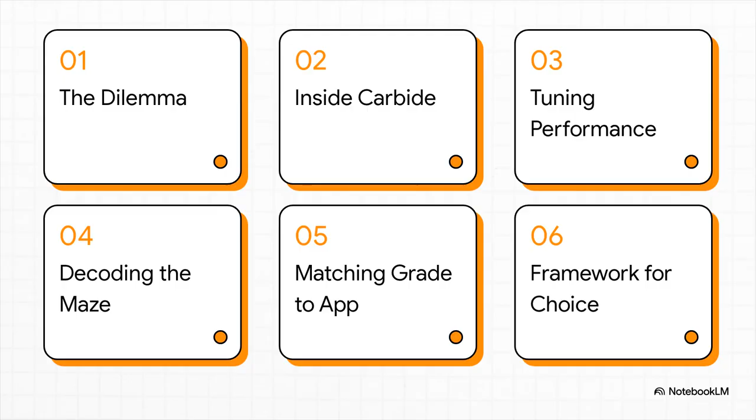All right, so let's jump right in. What's the fundamental issue here? Why do these tools actually fail in the first place? Oh man, we've all been there, right? You've got this beautiful, high-precision tool, thousands of dollars invested, and then, bam, it fails. The press stops, production grinds to a halt, and everyone's asking, what happened? Well, the answer almost always boils down to one fundamental trade-off.

So, a carbide tool really only fails in one of two ways. On one hand, you've got abrasive wear. Think of it like a slow death. The tool just gets dull over time, losing its edge. Then you have the other side of the coin: chipping and fracture. This is the sudden, catastrophic break. Now, the property that stops wear is hardness, and the one that stops fractures, that's toughness.

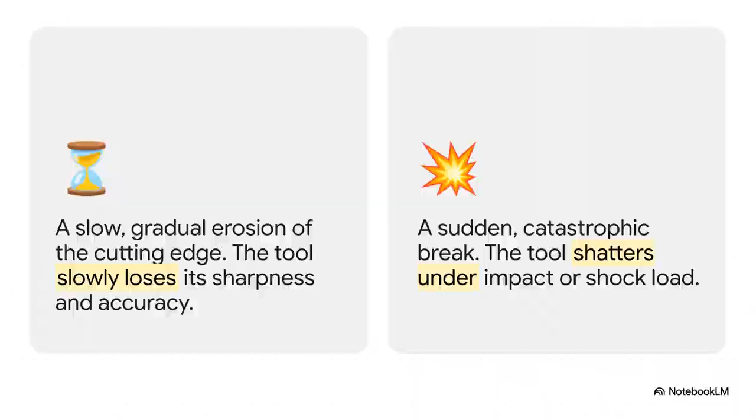And that, right there, is the core dilemma. You can't just crank both up to 11. If you make a tool harder, it gets more brittle. If you make it tougher, well, it gets softer. So, to solve this dilemma, we have to play detective and look inside the material itself. What exactly is this stuff we call cemented carbide?

You know, it's not just a simple metal, it's a composite. And the best way to think about it is like high-performance concrete. You've got the gravel, or the aggregate. These are the incredibly hard tungsten carbide particles, the WC. They give it wear resistance. Then you have the cement, a tough metallic binder, usually cobalt, that holds everything together and gives it its impact strength. And here we go.

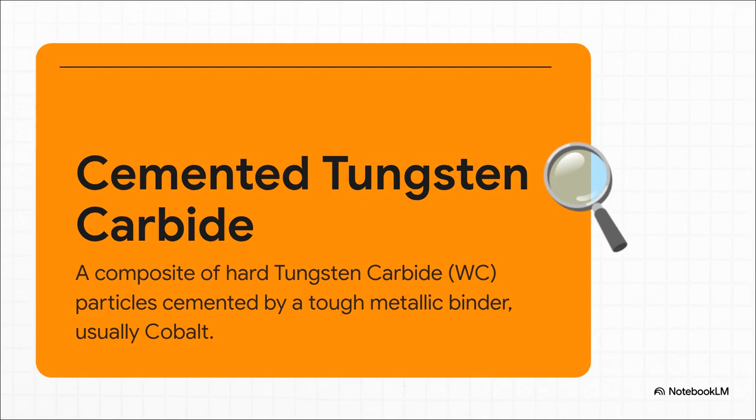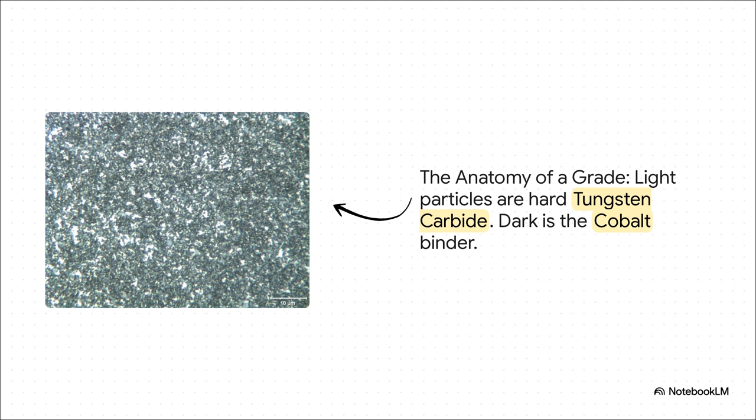This is what it looks like under a microscope, blown up 1,500 times. See those bright, pointy-looking particles? That's your super hard tungsten carbide. And all that darker stuff filling in the gaps? That's the tough cobalt binder, the glue holding it all together. As we're about to see, the ratio and the size of these two things, that's the whole secret sauce.

This brings us to something that trips a lot of people up: the grading systems. I mean, there are thousands of grades out there. How are you supposed to make sense of it all? Let's talk about what to ignore and what you really need to look for.

If you've ever looked at an old blueprint, you've probably seen C grades, C10, C12, that kind of thing. Well, this system is now considered dangerously unreliable, and here's why. A C grade only tells you the intended job, not what the material is actually made of. This is crazy, right? It means one company's C12 might have 15% cobalt and fine grains, but another company's C12 has 12% cobalt and medium grains. They'll perform completely differently, even though they have the same name.

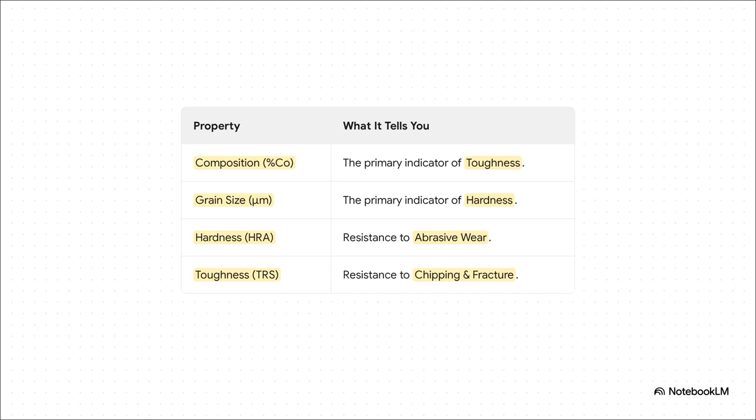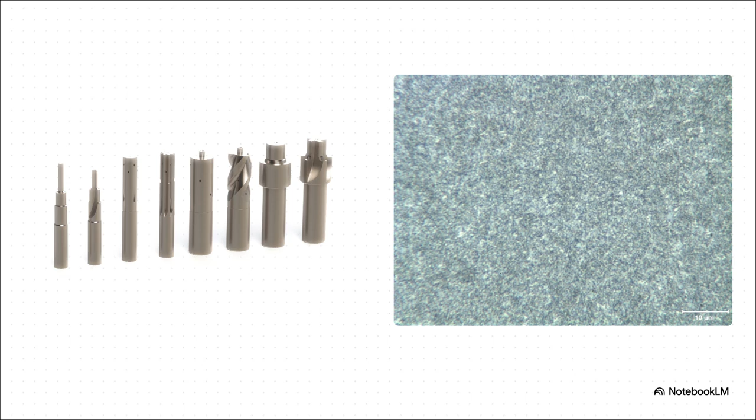Okay, this is where it all comes together. The payoff. Now that we understand the microstructure, we can start matching the perfect grade to the right real-world job. Let's kick things off with lamination stamping. For this job, the biggest enemy is just pure abrasive wear. You need a razor-sharp edge that just lasts. So, what's the solution? Maximum hardness. And that means you want a grade with low cobalt and superfine grains. The picture of the microstructure on the right? That's a perfect match. It's engineered specifically for insane wear resistance.

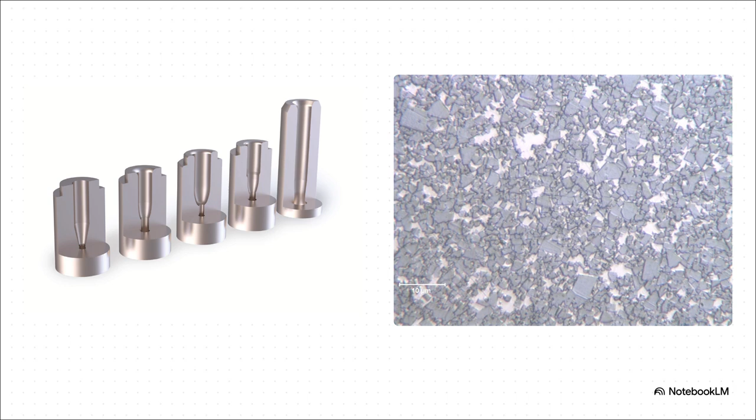So what about a job that's kind of in the middle, like forming and drawing? Here, you're fighting two battles, wear and also something called galling. That's when the material you're stamping literally tries to weld itself to your die. Not good. The solution here is a balanced grade, like this one, with a good mix of both toughness and hardness. And here's a pro tip. These grades often have special additives, like tantalum carbide, which acts like a tiny microscopic lubricant to stop that galling from ever happening.

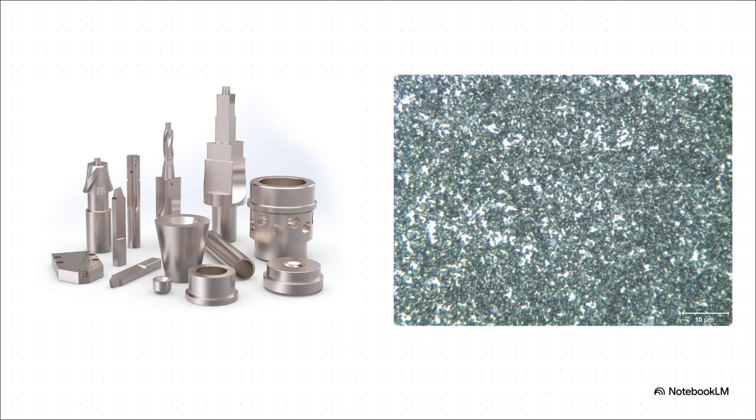Okay, so how do you take all this and turn it into a simple, repeatable process? Let's build a little framework you can use every single time you need to pick a grade. It really just comes down to a simple 4-step process. First, step 1. Analyze. Just look at the tool that failed. Did it slowly wear down to a nub or did it just chip and break? Step 2. Define. Based on what you saw, decide what you need more of. Is it hardness to fight wear or toughness to handle impact?

Step 3. Consult. Now you go to the manufacturer's datasheet and look for a grade with the right cobalt and grain size. And finally, step 4. Partner up. Share what you found with your supplier. Seriously, their engineers live and breathe this stuff and they can help you nail the perfect recommendation.

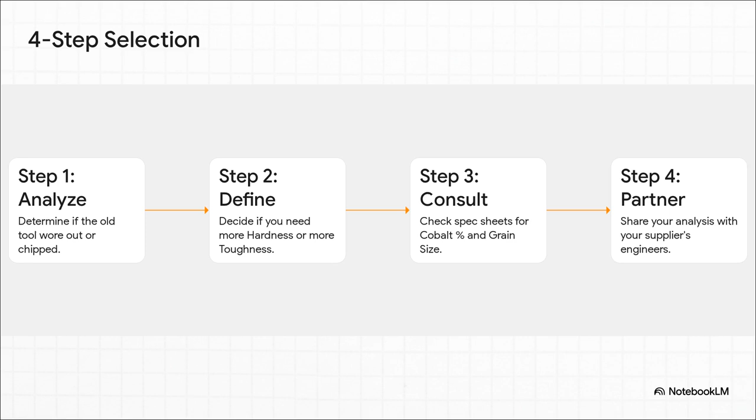So while that classic trade-off between hardness and toughness is always going to be there, the materials themselves are getting way, way better. We're seeing new stuff like nanograin carbides and these incredible advanced coatings that are starting to push past those old limits, promising the best of both worlds. The future of tooling isn't just about stopping failures, it's about hitting whole new levels of performance we couldn't even dream of before.